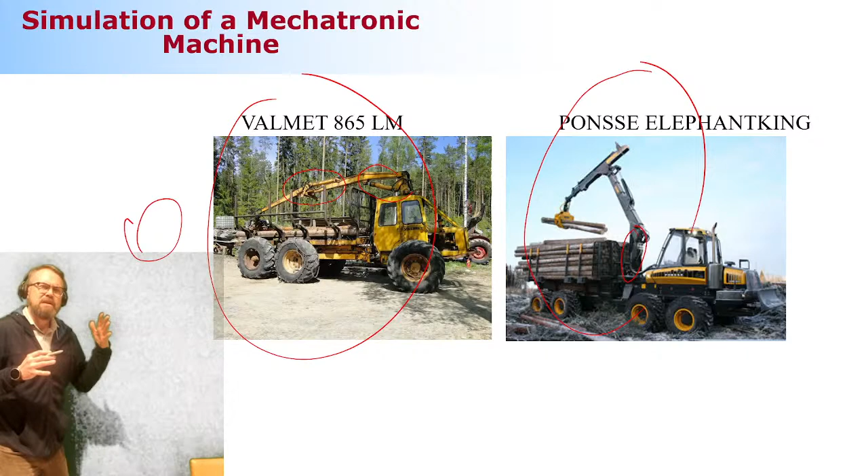There's still this lift cylinder. Yes, it's located in a slightly different way, but there's still a 4-bar mechanism that connects the lift arm and swing arm, connected by a hydraulic cylinder. So roughly speaking, development hasn't been so great.

This is a bit of an extreme statement, but when you step into the cabin of these two tractors, you can see there's a major difference. This is how the cabin looked like 50-something years back. The spools, which are the key element in the direction valve, were operated by manual sticks mechanically connected to the spool. The cabin didn't look so pleasant. And because there's always a great chance of different kinds of leakages in hydraulics, you can see there's a little bit of oil on the floor and so on. The ergonomics are not great at all.

Whereas the new one looked like this. Now in the new one, the direction valves are not directly operated by a stick—there's no mechanical connection. Instead there's a joystick that sends the signal to the direction valve, and that's how you control the machine. The ergonomics are on a different planet. They look much better, and usability is significantly enhanced because of the ergonomics and other features. Still, the operation principle of the hydraulics hasn't changed that much.

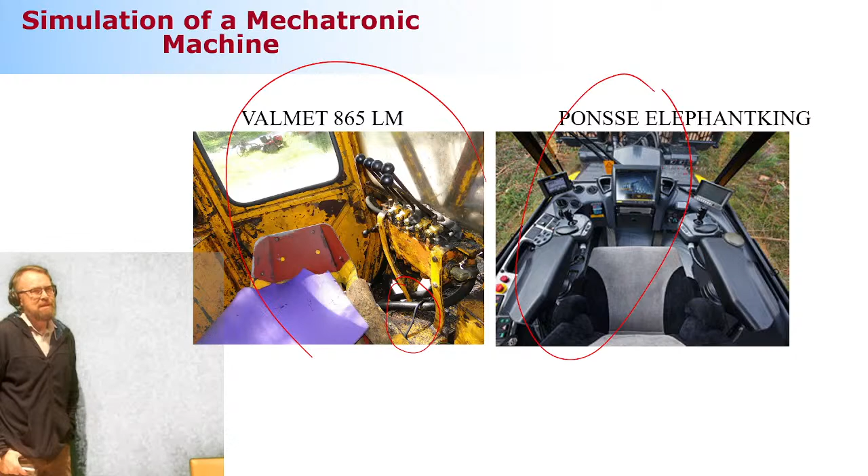But maybe this digital hydraulics will be the next big step. Maybe—it's been a promising field for quite a while already, but we'll see. That's what I'm going to explain to you later today.

What did we discuss a week ago? This first order differential equation that I explained in the first slide is extremely important for us. You must understand each of the components in the equation, referring again to how it's going to be on the written exam.

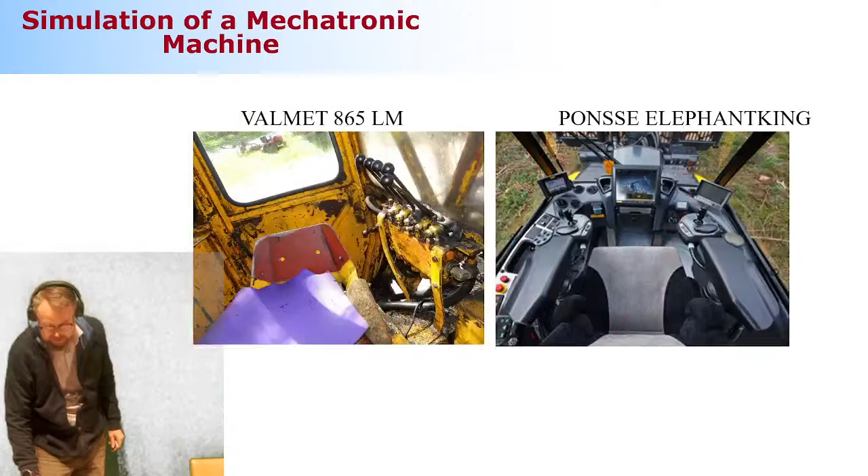Pretty clear, pretty clear. Okay, so undo the enrollment to the full exam and wait until we approach the midterm exam. Are we going to do that right after we've covered everything? Let me take myself back here. We need one more time for hydraulics, and then real-time simulation games, and then summary. So that's going to be two or three additional weeks, and then we're done.

Okay, back to this business - I was saying in terms of the midterm exam, a question you can see is: what are the different components in this differential equation? There is not a question asking you to derive this first order differential equation starting from the Big Bang. We are not expecting you to do anything like that, but we want you to understand the physical interpretation of it, and what it can describe and what it cannot describe.

So it can describe the pressure, and it can take fluid flexibility into account because of the effective bulk modulus. It can take the volume size and changes in the volume size into account, and it can take the flow rate in and flow rate out into account.

But it cannot take into account the pressure waves. Pressure waves sometimes take place in long pipelines - not so much in hose lines, but in pipelines where there's a very lengthy run. You keep on pressurizing it, then suddenly close the pipe - you close it here as well - so it's possible that there's a pressure wave traveling back and forth between these two blocks. That needs very fast hydraulics, and it's not a typical problem in mobile hydraulics. It can be the case in certain industrial applications, but not a very common one.

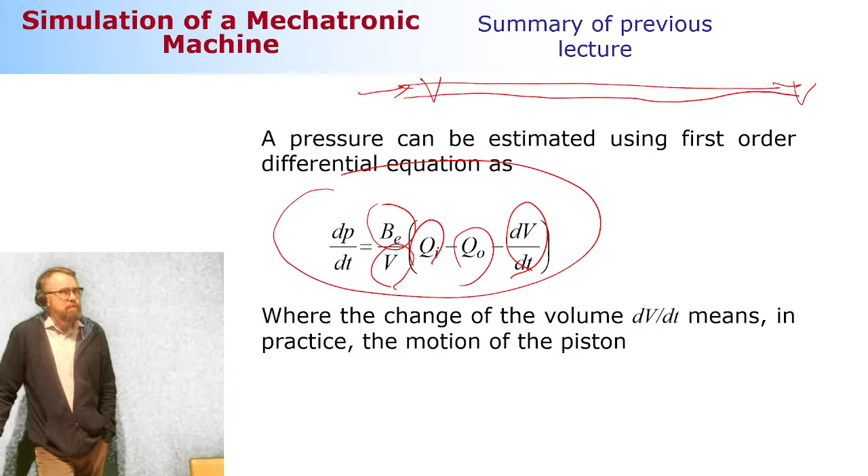You can, of course, take this into account as well by modeling the pipeline using a number of different volumes and throttles between the volumes. But that's not usual practice, because this can easily lead to problems in simulation.

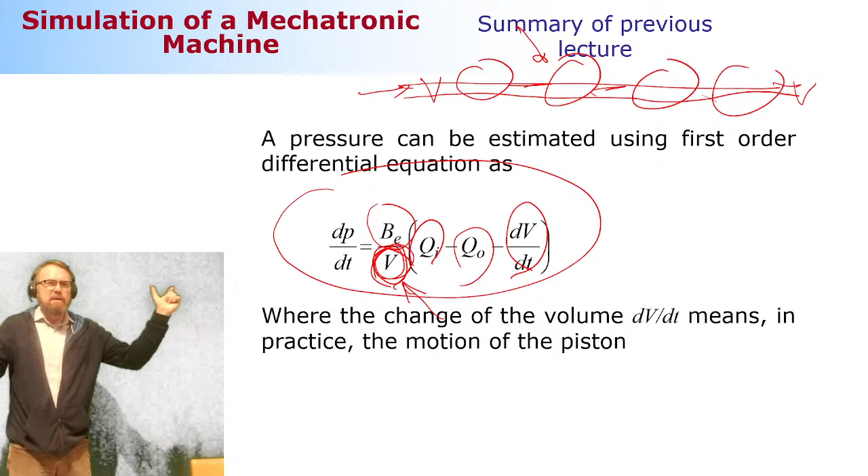The problem would be that if you keep on decreasing the volume size - look at where the volume is located, so the bulk modulus divided by volume - if this volume becomes very small, the numbers will go very high. That's called a numerically stiff system. A numerically stiff system, shortly speaking, is a system where you have a very wide band of frequencies - low frequencies and high frequencies. This combination is very nasty for numerical integrators, because they can tune themselves to deal with high frequencies, or they can tune themselves to deal with low frequencies, but this combination is typically quite a problem, and you want to avoid it as much as you can.

Okay, so that's it, that's about this differential equation. We also learned about how it can be used in the case of a simple damper.

In a damper, here is your first differential equation and your second differential equation, and now the flow rate tries to equalize the pressure difference. This is a bit of a chicken-egg situation: which comes first, pressure difference or flow rate? That doesn't really matter because they happen simultaneously in a simulation. As soon as the pressures here start to change, the flow rate tries to equalize the pressure difference. That's roughly how it happens. But if you suddenly make the flow happen, the pressure difference will take place as well. So that's the chicken-egg situation.

We learned that in real hydraulic circuits there's something called the discretization procedure. In discretization, you divide your hydraulic circuit into volumes where you assume pressure is equally distributed, meaning we cannot take pressure waves into account. That means I can assume the pressure right after the throttle is roughly the same as the pressure close to the piston, and that's the case if there's nothing introducing pressure losses. There's nothing introducing pressure losses the way this system is described, so this assumption is valid.

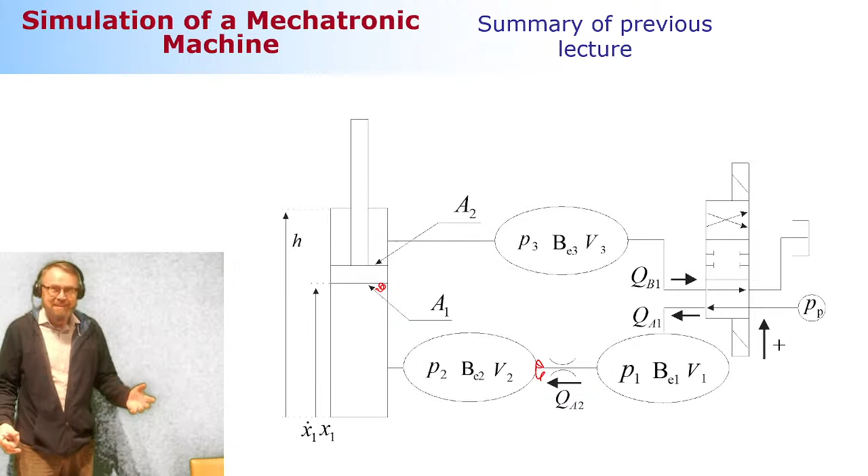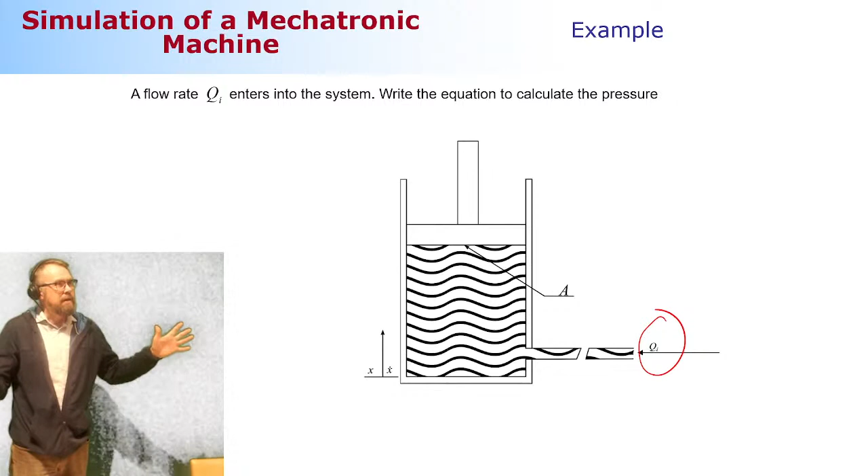So now I have a system here which is a hydraulic cylinder, and flow rates enter the cylinder. So what's going to happen to it? The flow rate, noted here as Q, came into this system. How can I compute the pressure at any given time using this first order differential equation? Again, certain steps we need to take.

First step is we need to define the equation that tells us what the volume size is. The volume size will be the hose volume, VH, where the flow enters the cylinder, plus the cross-section of the piston, A, multiplied by the stroke—wherever the piston location is at any given time, measured by X. X coordinate starts here; the farther off the piston is, the more the volume size. That's your first equation.

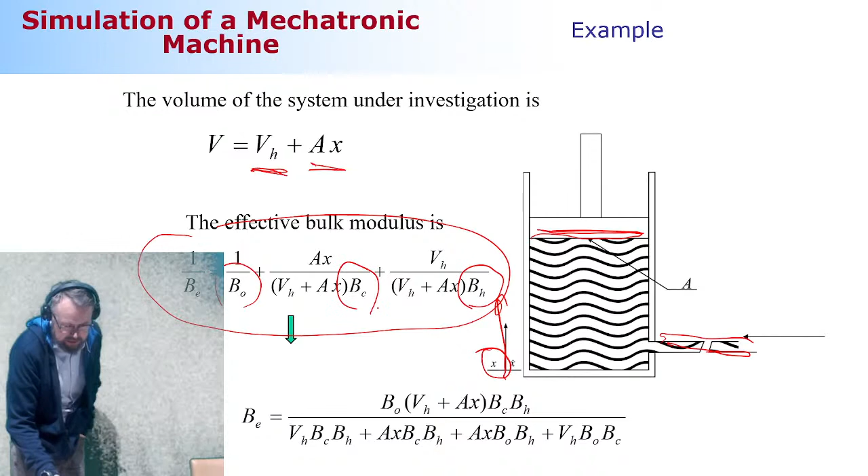Second one is the effective bulk modulus. The components I have are oil, accounted for by this term here, then the flexibility of the hose, and the flexibility of the cylinder, each with their corresponding volume size. When I compute the effective bulk modulus out of that equation, that's how it reads.

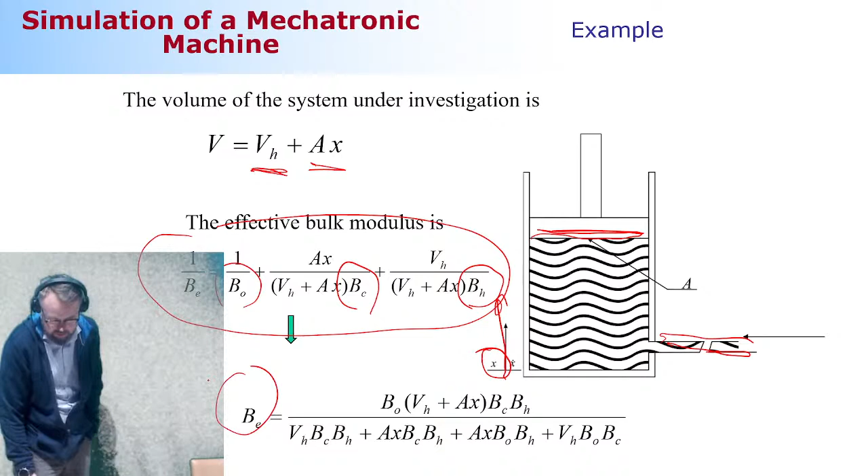The final equation is the volume change as a function of time. That's going to be the cross section, same as described earlier, multiplied by x dot, which is velocity. That's going to be your flow rate—cross section multiplied by corresponding velocity. That's the flow rate which is leaving the system, so when you enter it into your differential equation, this term must be negative in sign.

Think about positive motion: the volume gets bigger, so it's sucking the flow rate out of the system, so the pressure will drop.

Then the final component, this Q, is entering the system, so it has to be plus in sign. Whenever you do this kind of manual hydraulic modeling, make sure you have a drawing so you don't get confused about the signs, minus and plus, because that's a typical mistake I see in hydraulic modeling. Make a drawing to yourself, see whether the volume comes in or leaves—if it comes in, that's plus; if it leaves, that's minus. Simple like that. How you initially define things is up to you, but you need to be consistent, and the only way to be consistent is to make a drawing to yourself.

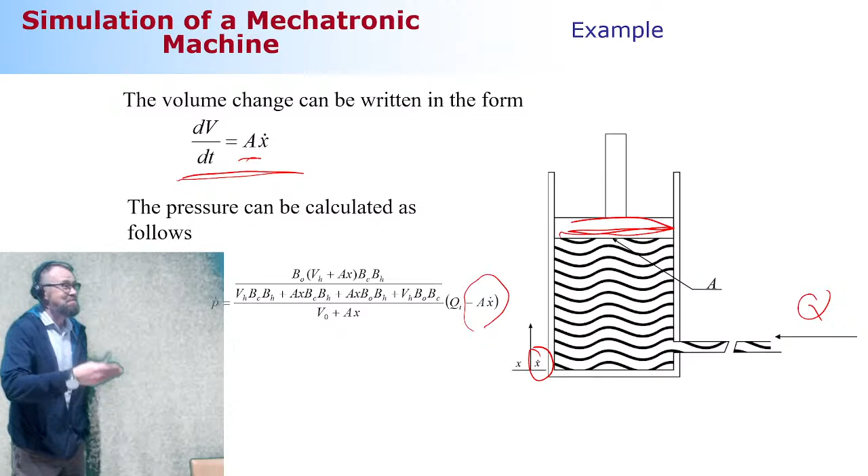All right, so have you guys seen this YouTube video about the worst professor ever? I was making the presentation for this week, Wednesday, and I was watching that one more time because it's so good. The worst professor ever keeps telling about 'make a drawing, make a drawing.' And I see that I am kind of like that guy too, because I keep on telling, make a drawing, make a drawing. So make a drawing, and take a look at this worst professor ever from YouTube.

So none of you have ever seen it, or have you seen? No, you haven't. Okay, go to YouTube and type worst professor ever, and it's not me, but it's somebody else. It may be me too, because there's a long list of professors that are not scoring so well, that they are not teaching so well. So you may check that if you want.

All right, this is something related to the flexibility or compressibility of a fluid. This is related to the assignment. Maybe this is coming a little bit late, but I wanted to explain how you can compute the natural frequency of the situation as described in this figure.

What I have in the figure is a hydraulic cylinder, which is a two-way hydraulic cylinder, so you can pressurize the piston side and piston rod side. So it can be pressurized on both sides of the piston. Then I have a mass located at the top of the system, denoted as M. And I'm asking, what is the natural frequency of the system?

The natural frequency can be computed when you know the stiffness and the mass. It's all the time a relation between the stiffness and the mass, more specifically the square root of the ratio of stiffness to mass. So the mass goes directly here, and the only component you need to define is stiffness.

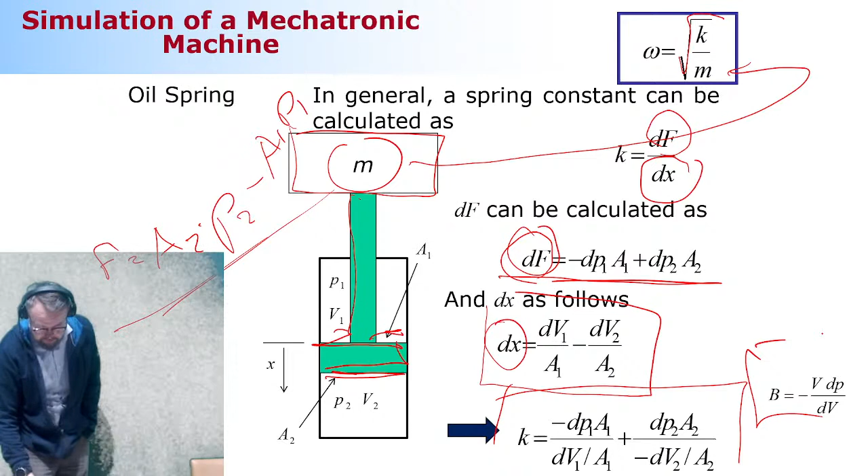Now if you use the definition of bulk modulus, sorry that I'm a little bit fast here. Using the definition of bulk modulus, you can use this relation, which came from the definition of bulk modulus, sorry about that. So it came from this equation, and this came from the previous slide. The stiffness can be computed as shown here.

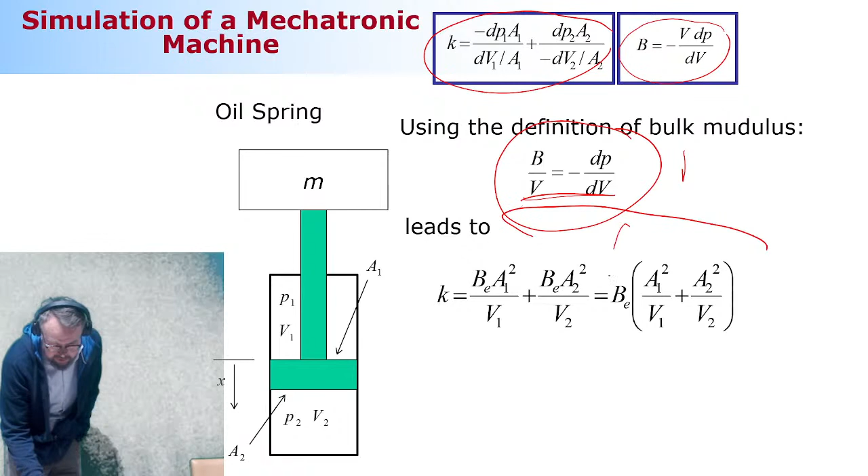And this will be your way to compute the natural frequency of the system that consists of the mass and the two-way hydraulic cylinder. How does that sound?

Makes sense. How do you do it then? By substituting the right component in the right place. That's pretty much all you need to do. The most problematic component is, of course, this guy, the effective bulk modulus. But other than that, fairly straightforward.

Makes sense. Okay, so moving on then. Let's look at the one thing I was unable to cover a week ago, and that is these flow types. Then we're going to move on to different components.

Now the flow types, as I mentioned in my introduction today, we have two different flow types: laminar flow and turbulent flow. Laminar flow is something where the viscosity plays a role. And that takes place, well, roughly speaking, very generally speaking, laminar flow takes place when the pressure difference is small. This is an untechnical term - when the pressure difference is small. How small does it need to be? Well, roughly speaking, if it is less than 2 bars, then there's a chance that the flow type is laminar flow.

Now, in a modeling perspective, there's a major difference between laminar flow and turbulent flow, and it's all related to how the pressure difference relates to the flow rate. So, the scenario is this: here's my pipe.

And I have here some kind of a throttle, something that introduces the pressure losses. I have here P1 and P2, and I'm assuming P1 is bigger than P2, so the flow will travel from left to right. The pressure difference I keep mentioning is, of course, P1 minus P2. Since P1 is assumed bigger, this is going to be a positive value.

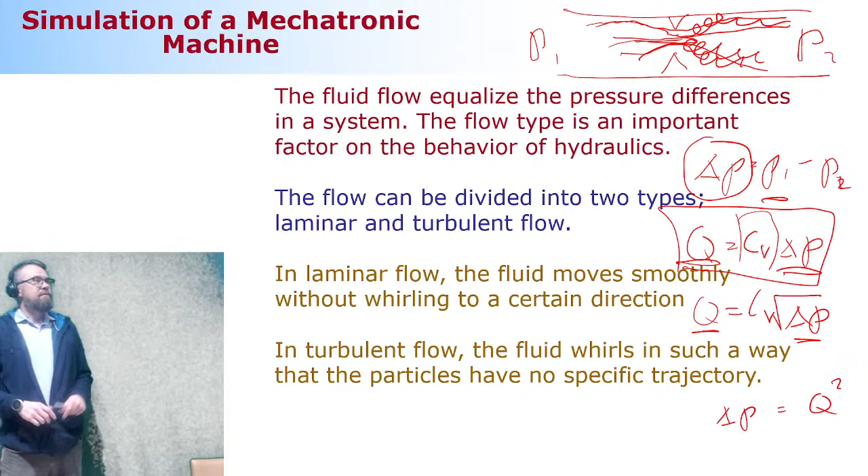So these are the two flow types, and for us, the turbulent flow is way more significant. That's what we're going to take a closer look at when examining the different components. Okay, so that's about it. And then how are you defining what is what?

Theoretically, there's a way to do it, called the Reynolds number—I'm sure you're familiar with this. The Reynolds number tells you when the flow will convert from laminar to turbulent. Of course, it's not a single moment when that happens, but a period of pressure differences where it's unclear what it is—it can be a mixture of laminar and turbulent. Roughly speaking, though, you can define what is what by comparing the Reynolds number against something called the critical Reynolds number.

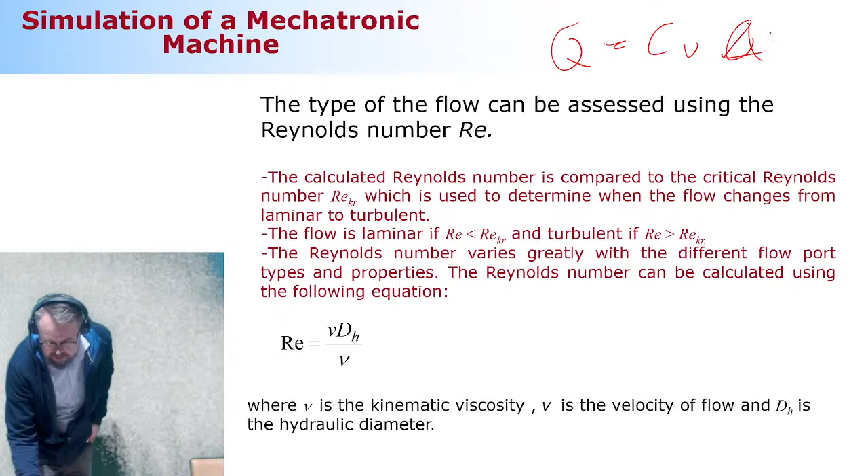The critical Reynolds number is something you can find from pre-calculated tables. If your number is less than the critical Reynolds number, you can safely assume your flow type is laminar, meaning that in modeling you can use this relation with delta P. That's how it goes. Again, if you look at flow rate versus pressure difference, this behaves linearly, and the angle here is defined by this one single parameter.

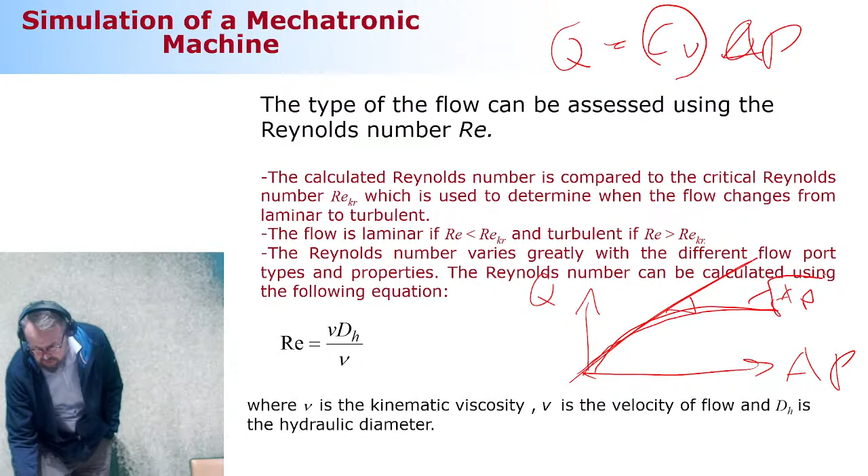Now, if the number is more than a critical Reynolds number, then it's assumed that they behave quadratically. So this curve here is a square root curve like this. Roughly that's how it behaves. So that's for your information.

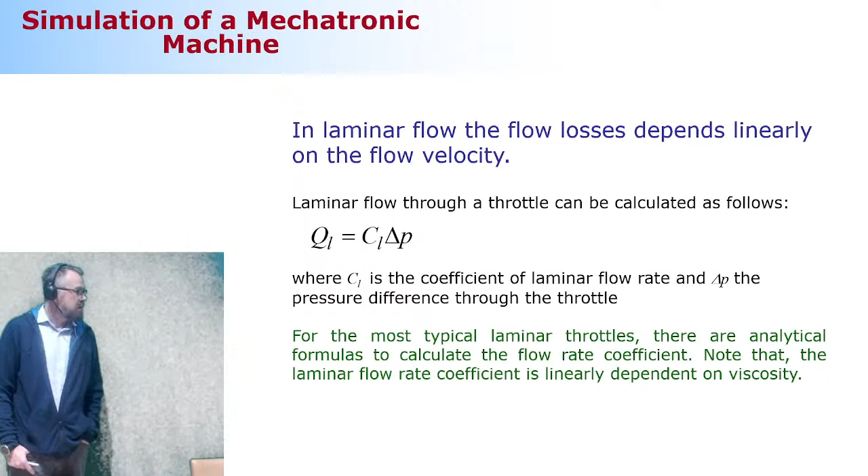Now, this is what I pretty much explained already. This is how the flow rate and pressure difference are related in the case of laminar flow. Keep in mind that there is this one single parameter, the angle of the curve, that relates these two matters. How do you compute it?

Well, here is an example about the pre-calculated tables. You see that if you have a rectangular cross-section throttle. I don't know how you can manufacture something like that, unclear to me. But anyway, there's a flow entering here and leaving here. In a case like this, take a look at this.

So flow rate and pressure difference are linearly related. This angle is defined once you know the B and H. This is H and this is B. Once you know the geometry of the throttle, and the L is the length here. And look at this, this is kinematic viscosity. Viscosity is involved as well, as I explained a week ago, I think.

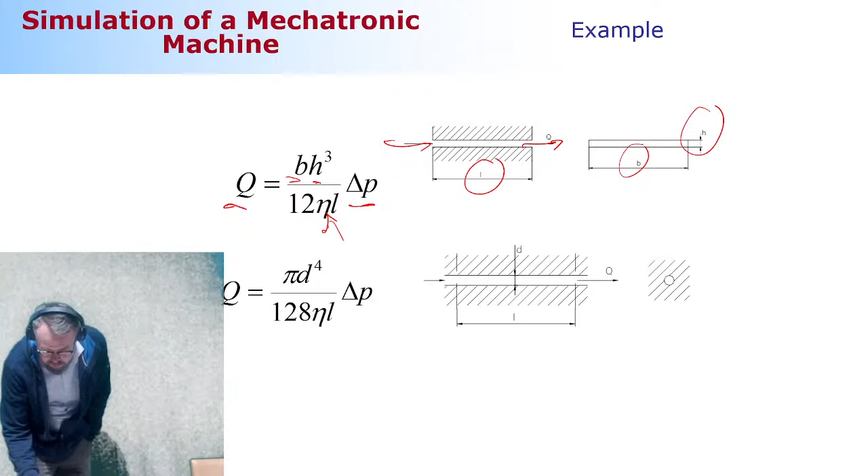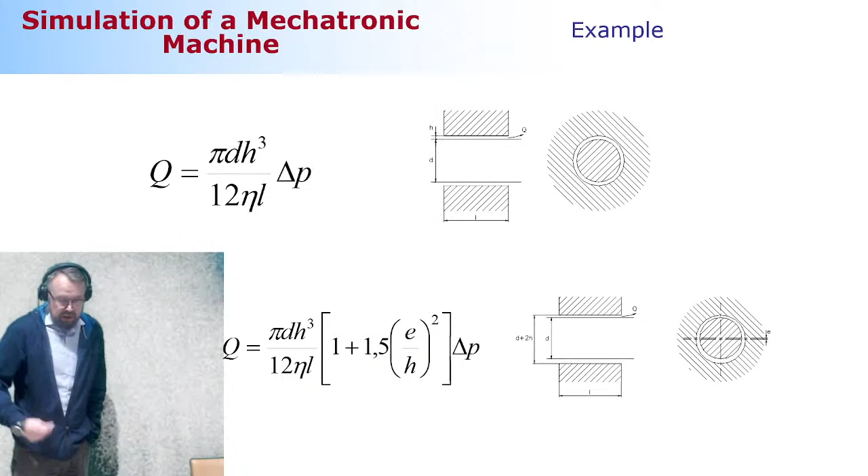So that's the case. Here is a little different kind of throttle, which is very commonly used. This is drilling. So once you know the diameter of the drilling and the length of the drilling, that's all you need to know. The viscosity is needed as well. And then more and more examples. There are pre-calculated tables to compute that missing parameter.

Makes sense? Okay, then finally, this turbulent flow, where from our perspective, the important information is this: flow rate and the pressure difference are quadratically related. So meaning that if you see the curve like this, which is nonlinear and acting quadratically, that's going to be the turbulent type of flow. This type of flow, if you see it, you can't model as a laminar flow.

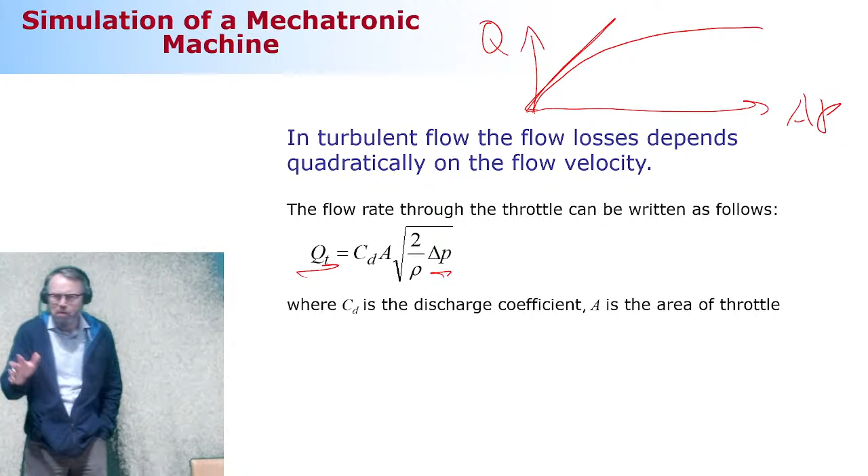So next time you see Professor Handroos, make sure you salute him because of his accomplishment regarding the semi-empirical modeling approach. Deal? Don't do it, because then he's going to ask, what is wrong with you? Who asked you to do it? He's not going to be happy with me.

Okay, so here are the different components. The first one is a throttle valve. This takes us back to your question of how you can model it. Throttle is already a component where you need to know the dimensions, and it becomes more complicated when you look at other components like the direction valve. The direction valve has a throttle size that is changing continuously, because there's a spool plugging the flow, sometimes a little, sometimes not at all. So how do you take that into account?

And within 10 minutes or so, there's going to be the first-in-class quiz of the day. Ready for that?

Okay, so the first one is a throttle valve. This throttle valve is a good example of the semi-empirical modeling approach. Before we step into that, what are the modeling possibilities we have?

Well, of course, we can use analytical approaches to model this component. That would mean we need to use all the parameters found in real life. For example, with a pressure relief valve, you need to first create the equation that defines where the spool or poppet is located, and based on that, compute the orifice or throttle size, its physical dimension. But you need to know the mass of the poppet, the spring coefficient, and many other parameters that are extremely difficult to get. So that analytical approach is not practical.

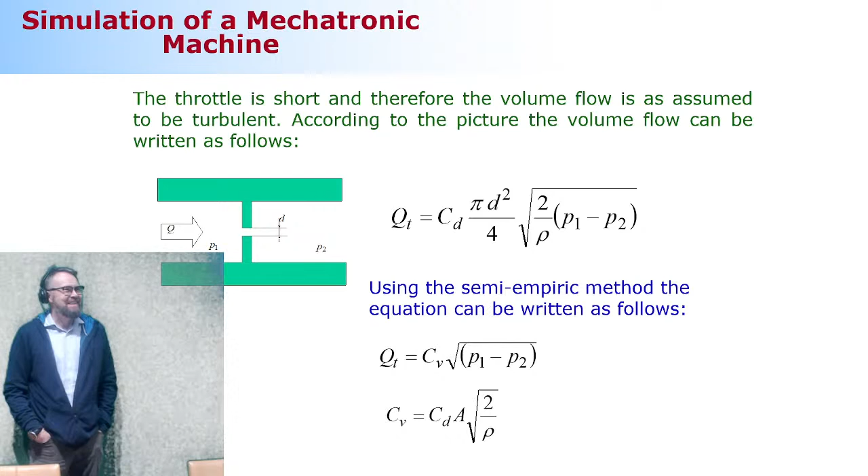Okay, so we were here, we were in this throttle valve, and here's an example. This is a characteristic curve. How come I lost it? Okay, so it's back. All right, so this is a characteristic curve offered by a manufacturer.

What I have in this characteristic curve is flow rate, and look at the units I'm using. I'm using liters per minute, which is the typical way units are used in hydraulics. But when I want to create the model, I want to use SI units as much as possible, because converting units in hydraulic modeling is a big headache and not recommended. Try to avoid it as much as you can. So that's going to be my flow rate.

The pressure difference is this one here, offered in bars. Bars, another big headache, but this is how you typically see the units used. Again, it's extremely important that you convert everything to be in SI units. Okay, my pressure difference is here, my flow rate is here, this is my characteristic curve.

The first thing I can learn from the characteristic curve is that this particular component has turbulent flow. How do I know that? Because of the quadratic nature of the curve, it's not linear, but quadratic. So if that's the case, it doesn't matter where I take the point from the curve, I can take it anywhere I want. I substitute the information into this equation, which defines this semi-empirical parameter CV.

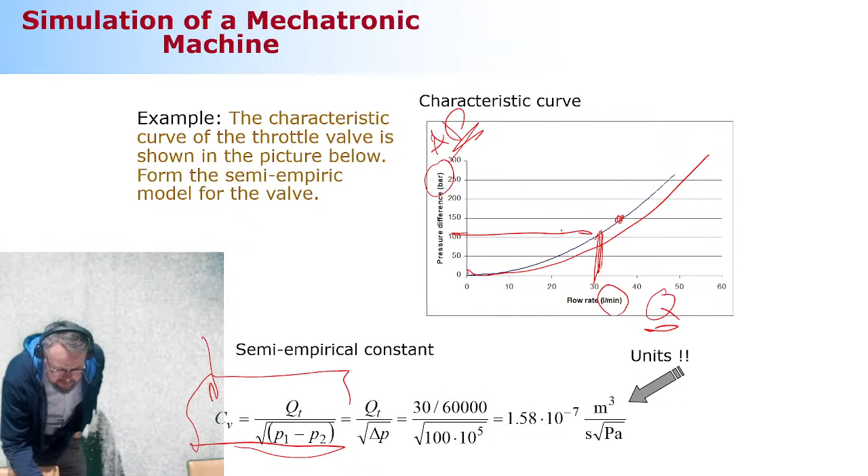So I'm taking the point at 30 liters per minute, and in that case the pressure difference is 100 bars. This is when I converted 100 bars to be in SI units, in megapascals, so it's in pascals, and then this 30 liters per minute is converted to SI units as well. When I do the math, this is how it looks.

Take a look at how bad the units are. So you don't want to convert the units because they are so bad. Anyways, so my model is almost ready, I have my unknown parameter.

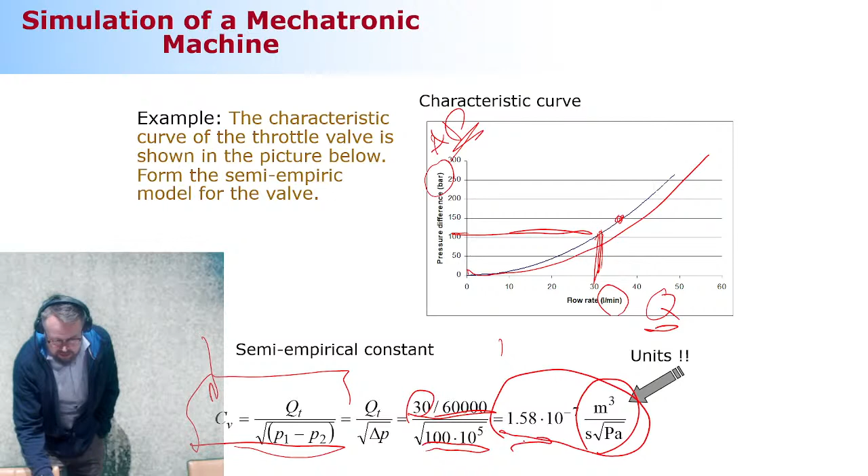Only thing is I need to make this final equation, shown here. My flow rate through this component will be my semi-empirical parameter multiplied by the pressure difference. But because the pressure difference might have a minus sign, I need to use a minor trick here. This term under the square root, I'm going to use an absolute value there, so I make sure that whatever goes under the square root must be positive in sign.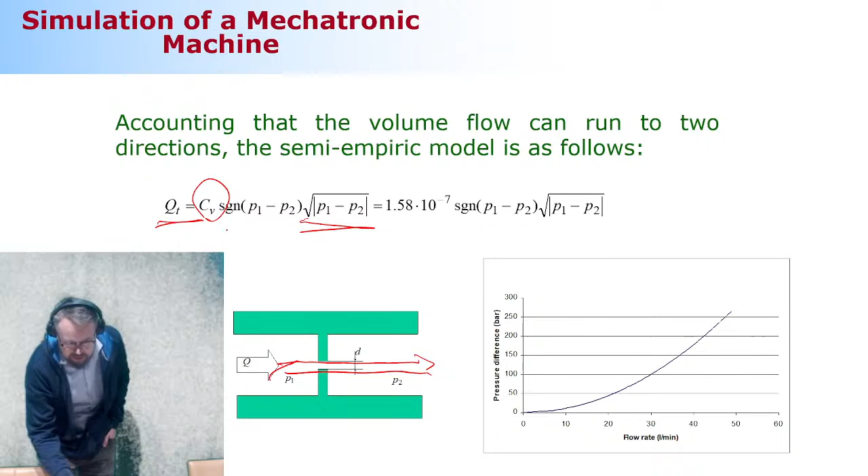But because the flow can go left to right and right to left, I need to take that into account. I'll do that by using a sign component, shown here. The sign component gives you 1 or -1 depending on what's inside the parenthesis. If the value in the parenthesis is negative, sign gives you -1. If it's positive, it's 1. If it's equal to 0, it's also 1.

That's going to be your equation. End of the story. How does that sound? That's called the semi-empirical modeling approach. Pretty straightforward, right? Okay, let's take a look at another component.

Direction valve. There are many different types of valves, and we're going to look at a valve actuated by using a magnet, though it doesn't necessarily need to be the case. Remember, we looked at valves in the very beginning where these were mechanically operated. There was a stick connected to a spool, and the spool is the one that moves inside of the direction valve.

Now comes something extremely important related to valve modeling, because valves consist of a moving component. So the first step in modeling valves is to know where this moving component is located. You could model that using the equation of motion, but that becomes complicated because then you need to know all these tiny parameters about masses, springs, and so on.

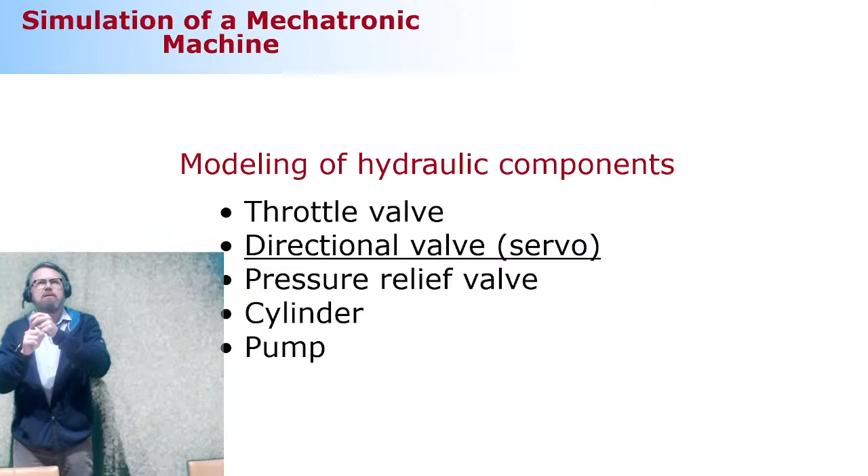It's not recommended to do it this way. But you have to have some kind of equation that tells you where the spool is located with respect to the valve itself. That's going to be the first step. Once you know the valve position, then you can compute the flow rate through the valve. So two steps are needed, and here it is, put in writing.

So here's an example. What you can see on the right side of the slide is a pressure relief valve. The pressure relief valve is typically closed, and it's closed because of the pretension of the spring here, which makes sure that the valve fully closes this cap.

What then happens is that this spool is pressurized here, but the same amount of force is created in the opposite direction because of how it's constructed. So it will remain closed no matter what the pressure inside is.

But then we have this kind of secret tunnel, right here. There's a throttle valve that reduces the pressure, taking pressure to this side of the spool. Because of this pressure, when it becomes higher than the pretension of the spring, it opens.

But how much it opens at any given time—one possibility to model it would be to take the spring coefficient, pretension, mass of the spool, and friction into account, but that becomes too complicated. We don't want to go that way. So we want to use a shortcut to model the spool position.

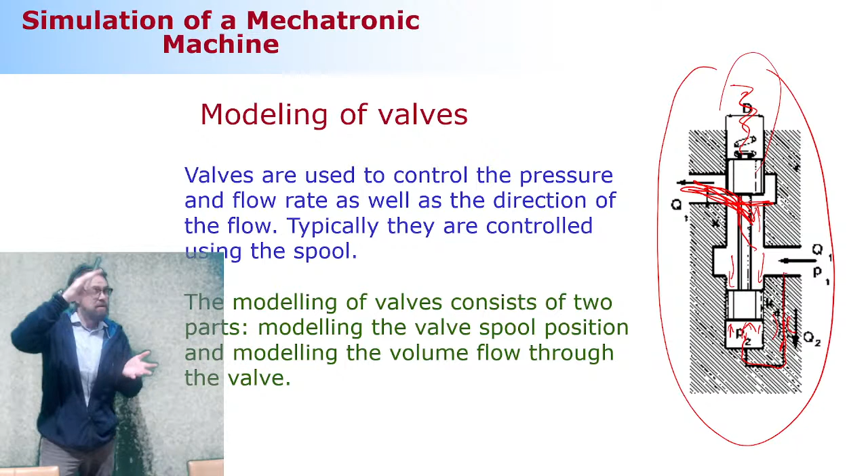Okay, makes sense. So how can we do that in the case of a direction valve? Well, before we look at that, let me give you a little bit of vocabulary about what you need to know. The direction valve operates because of this moving spool.

There is a spool that goes left and right, as you can see in this picture here, and there is a land. The land, which is this thicker part of the spool, blocks the direction of the flow, or blocks the access of the flow. The drawing symbol of this valve looks like this.

It connects ports A and B by pressure and the tank. If there's a pressure line here and you move this stick to the left, it opens the line between A and P. When you move the stick to the right, it connects the pressure and B, which is this operating condition.

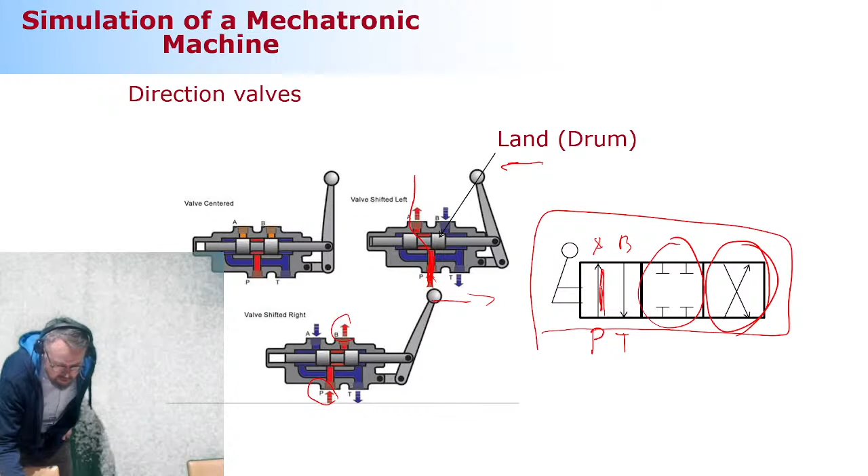When the spool is in the middle, it's assuming no flow rate whatsoever. There are three different scenarios: P to A, P to B, or no flow whatsoever. So to determine which scenario you need, you must know the spool position. But not just that, you need details of the spool position, because the throttle size will vary, as in the case of a pressure relief valve. It's not necessarily fully open or fully closed, but can be anywhere, because this sticks. You can put it anywhere you want, 1/4, 1/5, anything is possible.

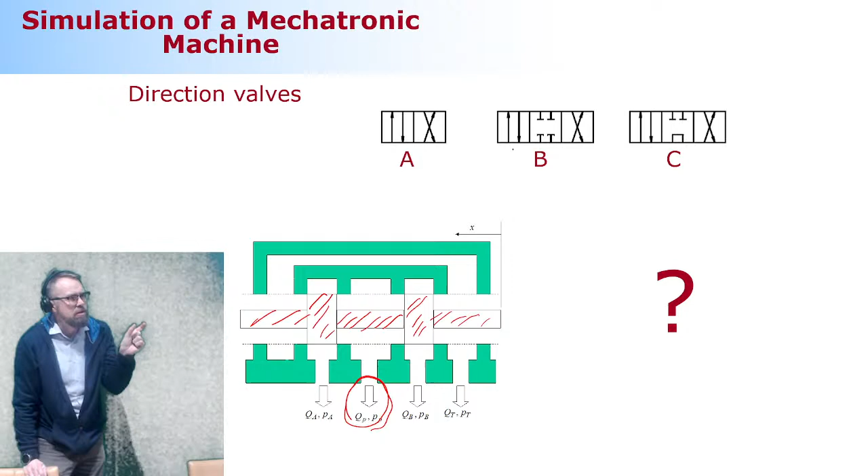Here's another cross section of the direction valve. In this case, I have the pressure line here in the middle, and again there's a spool. This component is a spool, this is a land. This is called a zero lap, because it just barely blocks the connection when it is in the middle. Sometimes the land could be smaller than this blocking, so it's possible that even in the middle condition there's a flow rate that travels between the different possibilities. But here it's just blocking it.

Understand that if I'm moving this to the left, it's going to open this channel here, so P and A will be connected. And if you move it to the right, then this will be opened instead. That's the way it works.

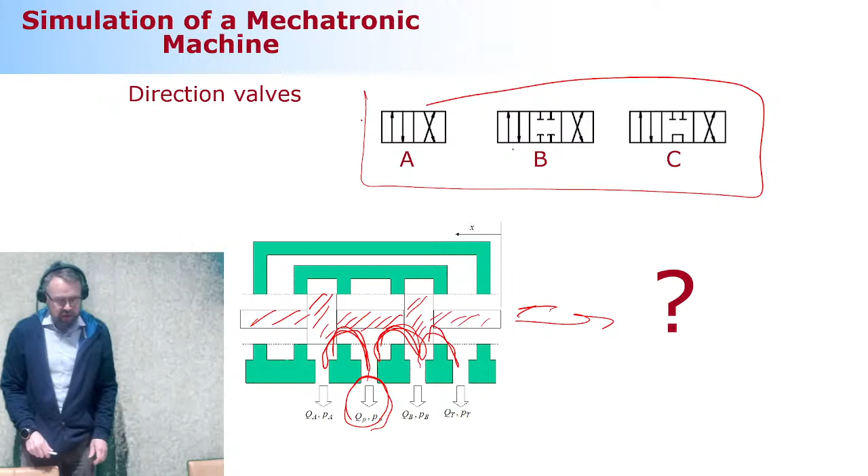So what is the drawing symbol for the direction valve as shown in the picture? This is not an in-class quiz, but soon there will be one. Is it A, B, or C? You can relax, this won't make your life any different since it's not the in-class quiz, but which one is correct?

Okay, so Team A is voting. Is the entire team voting for this one, B? Okay, what about Team Finland? No comments. Okay, no comments from Team Finland. What about the other teams we have here? No other teams, also no comments. So we only have one team voting B. Okay, other teams, do you agree with Team A, or do you disagree? It is B.

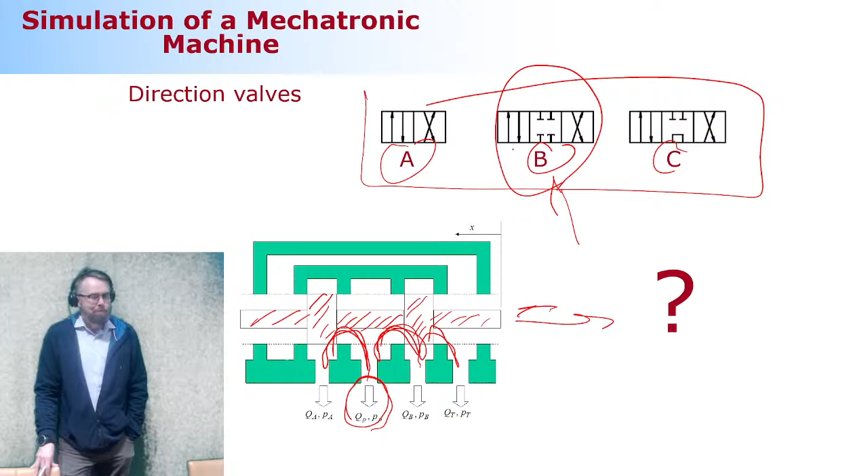It is B, because this connection is missing, since it's a zero land system. That's how it is. These are the different scenarios. This is where the land is smaller than these drillings, so its middle position is this - this is what we just looked at. This is where the land is a little bigger than the drillings, and it's still going to be the same drawing symbol.

But then comes something extremely important. The valves can be constructed differently depending on how the flow rate to the valve relates to valve opening. Many scenarios exist, and in this class we can assume this relation is linear. We also assume we're dealing with zero land valves, meaning as soon as we move the spool left and right, there is immediate flow. But that's not necessarily the case, because with a positive land spool like this, you need to move the system quite a bit left and right before you see any flow.

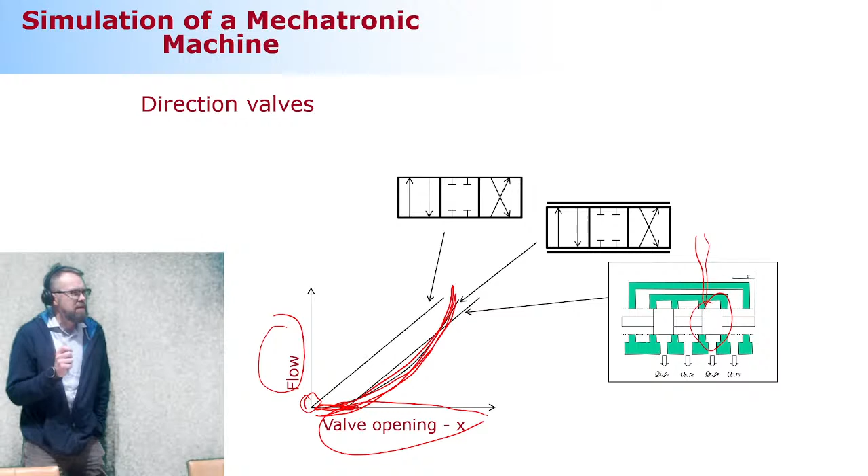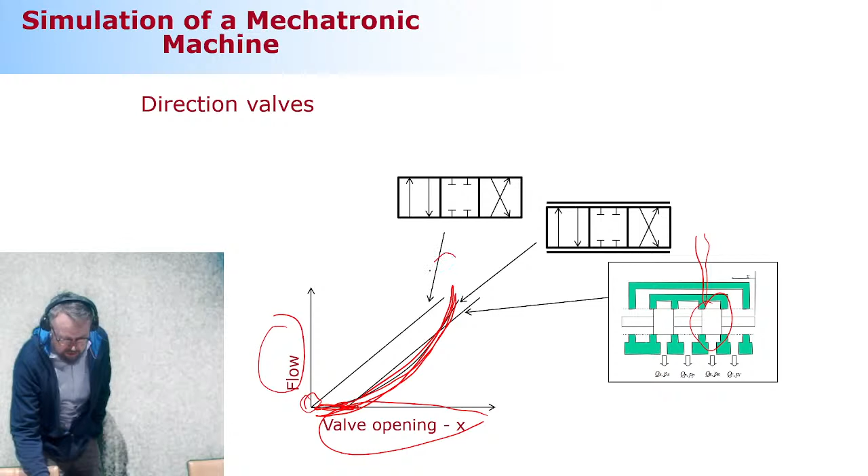You need to get rid of this overlapping, and you can get rid of it by moving this much to the left and right. But then there's one very much used type of valve, the proportional valve. That means the valve opening and flow rate are not linear, but nonlinear, like the scenario shown here. This is used quite a bit in certain applications where you need a lot of velocity, like in a crane - sometimes you need full speed, sometimes you need a lot of accuracy. When you use full opening, you have full speed, a lot of speed, whereas when you come close to this position, you get a lot of precision and accuracy to make sure you're exactly positioning your system where you wanted. So that's the proportional valve.

Okay, now that is the modeling business then. Like I said, there are 2 steps to take. The first step is this. And now, please put your full attention to me, because I'm going to ask momentarily what this equation is describing.

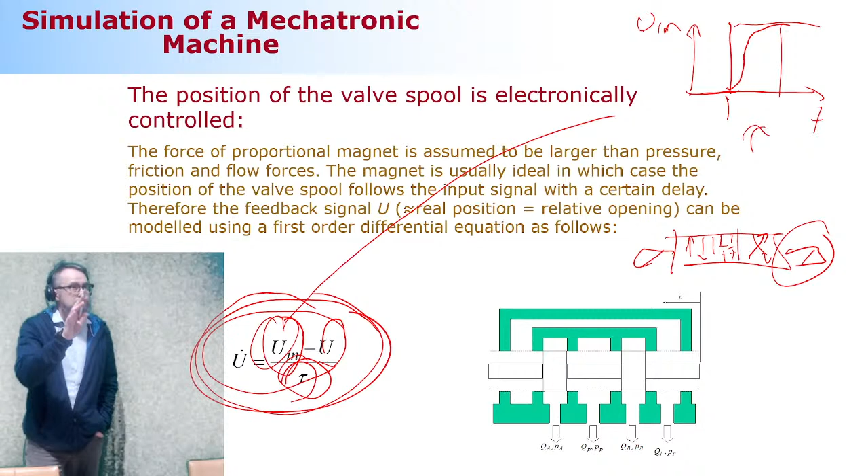But my question is, what is this equation describing? Do you guys know what it is? Spool position. And once you know the spool position, then you can compute the flow rate through the valve.

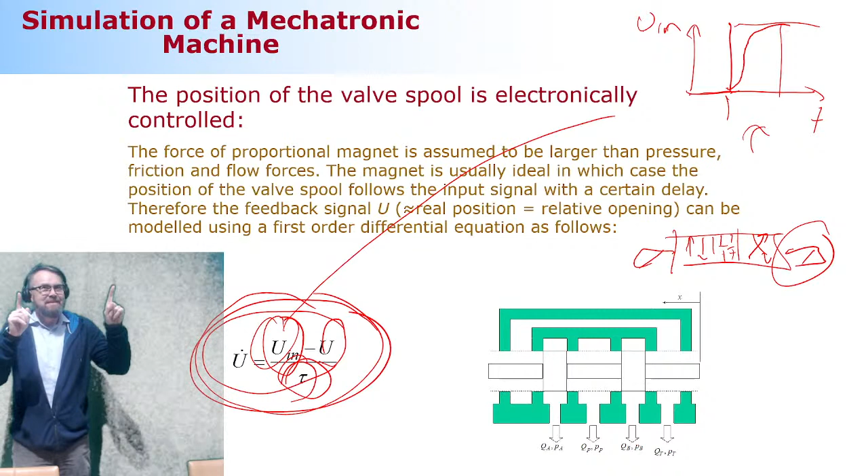All right, so where can you get this time delay then? Now you can get it from the manufacturer's catalog, because manufacturers offer information about how fast the valve is. And it's made by an experiment where you're sending a signal to the spool, and the signal is a sine signal where you start increasing the frequency.

So it's a fully closed, fully open signal to the valve, and you're increasing the frequency until it is very high frequency. At a certain point, the spool cannot follow this anymore, so it's left behind because it cannot move as fast as the signal itself. And when it's left behind enough, that's when it is defined that, okay, that's going to be your speed of the valve. It comes from what is called a Bode diagram.

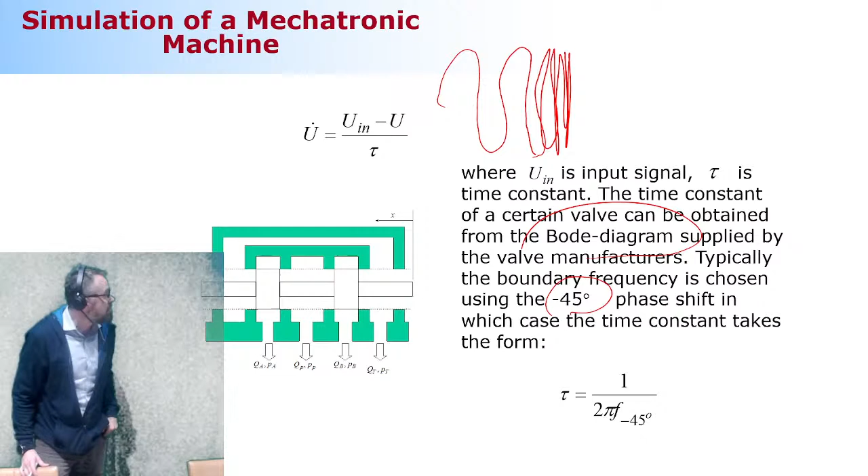I'm going to show you an example momentarily. And when it is left behind something, the value of minus 45 degrees, that's your speed of the valve. But again, this is offered by the manufacturer's catalog. Example will come momentarily. Okay, makes sense?

All right, then once you know the spool position, the final thing to do is model the flow rate, and we're going to use this semi-empirical model where the spool position is multiplied by CV. CV you can get directly from the manufacturer's catalog. End of the story - it's simple like this. First, spool position using this delay equation with tau coming from the Bode diagram, and once you know the spool position, you can compute the flow rate through the valve.

And again, you need to know the pressure difference that is coming from other sources. But that's it - pretty straightforward. Makes sense? Makes sense. Okay.

Okay, how is the success rate then?

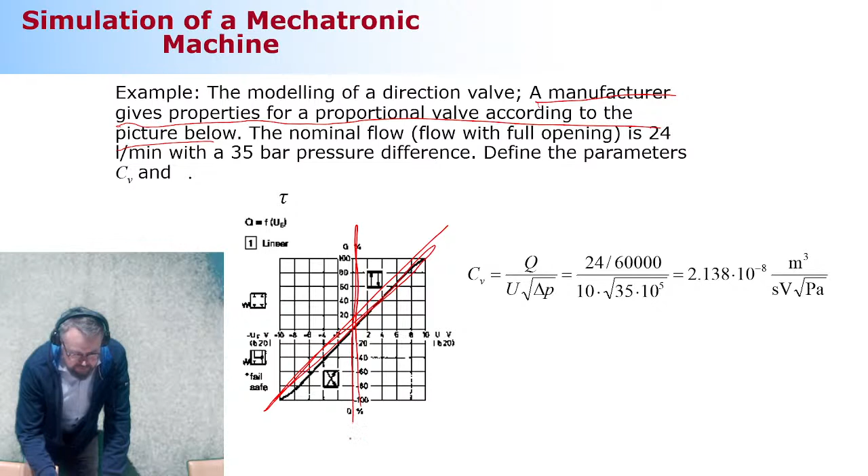Example: model of a direction valve. A manufacturer gives the properties of the proportional valve according to the picture below. Here's the first picture. It shows the valve opening versus the flow rate. You see this is a zero-lap valve, because as soon as you move the spool left or right, flow starts to go through the valve. So it's zero land. And you can also see that the relation between valve opening and flow rate is roughly linear—not exactly, but linear enough to be modeled as linear. The manufacturer's catalog states that the nominal flow at full opening, meaning this point here, is 24...

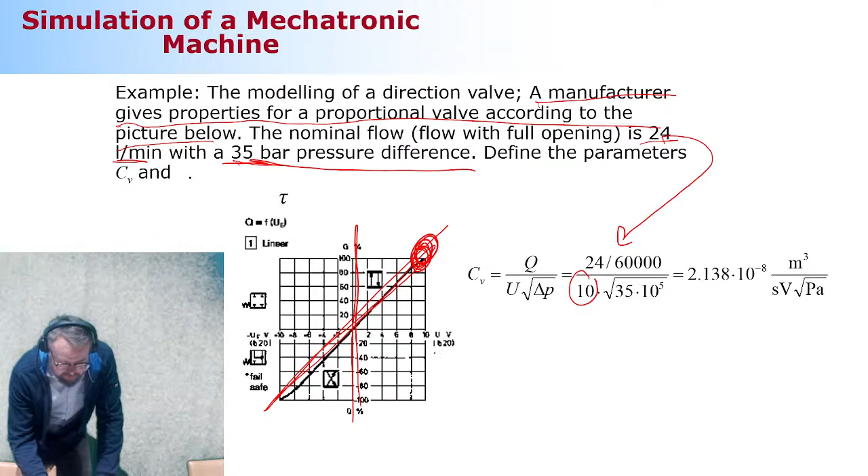24 liters per minute when the pressure difference is 35 bars. Here's the information I need to compute my semi-empirical parameter. I'll take these 24 liters and convert to SI units. I'll take my fully opening—here it's 10 volts—and put that there. Then I'll take this pressure difference and convert that to SI units as well. And here's my semi-empirical parameter.

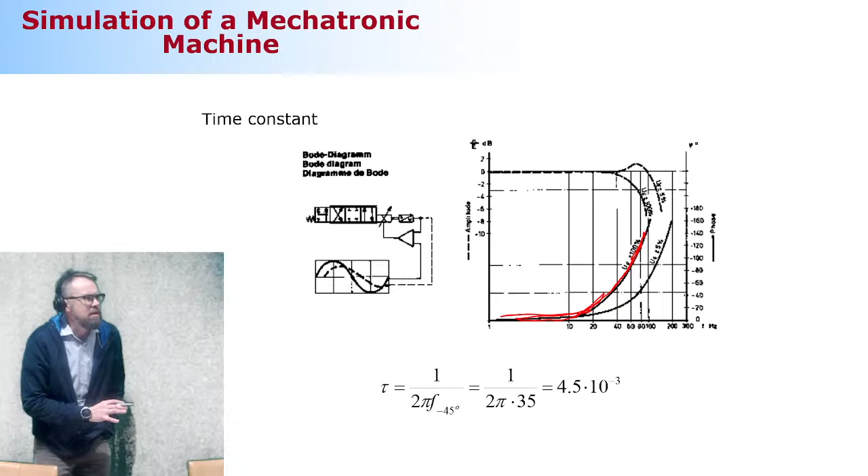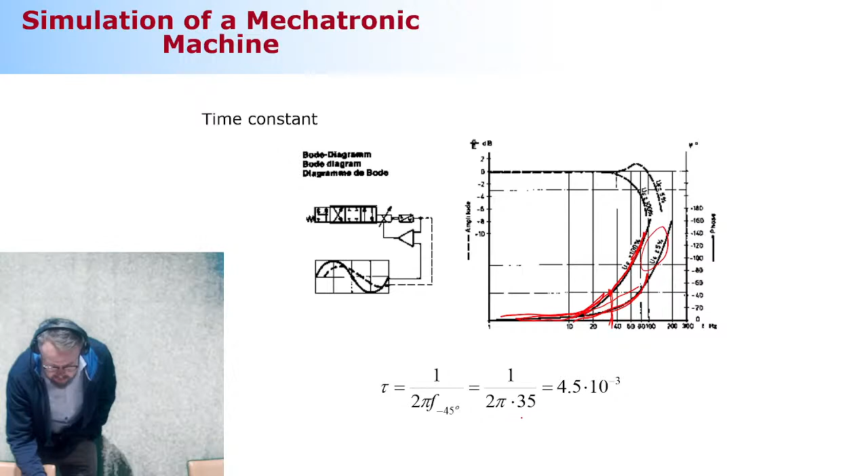Then I need to know about this time constant, tau. Here's a Bode diagram. It shows how well the spool can follow the signal—this is a sine signal. When moving this valve from fully open to fully closed, this is the curve, like 100% opening to 100% closing. You can see it follows very well until the frequency reaches roughly 35 hertz—that's when it's unable to follow anymore. That's my time constant. But if using only 5% opening instead of fully open, it's able to follow the signal further than in the fully-open case. But let's take the worst possible scenario—so here's where the hertz value is taken, and this is my time constant. The final equation isn't combined, but the parameters are here.

Okay, so let me take myself back here and look at the in-class quiz. Okay, so the success rate is going to be 65 today—that's my guess.

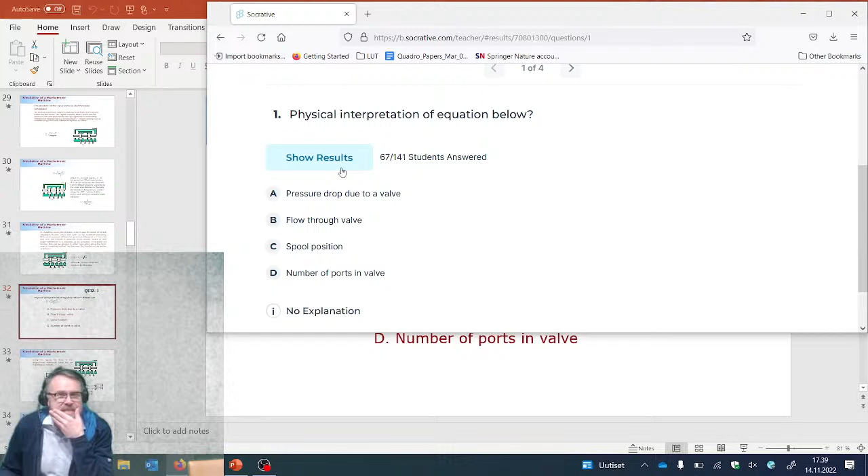Okay. So you don't see it? Oh, okay, you want to see it? I can tell you. You don't trust me. Not yet. Okay, so are you guys ready? So that came with a yes. Okay, because I think—my guess is 65%. 65, 65, 65, 96, 96. Look at the winner, so where's the winner? Here's the winner. Here's the winner. Very nice, thank you very much. Thank you very much. So let me see.

Okay, so very bad news, because we got voting for each of the items—each of them—and only one is correct. And of course, that's spool position.

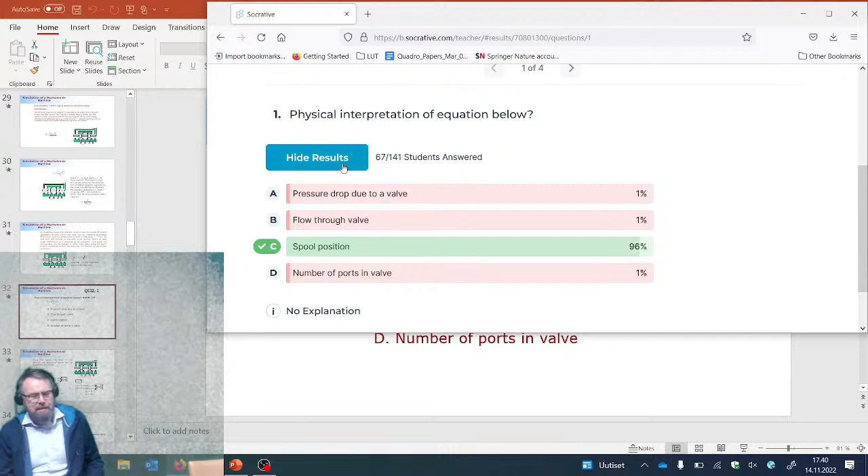Yeah, sorry about that. I don't know how you made it a week ago—I still don't get it, how it is possible. Today you don't score 100%, but last week there was no proper guidance and you scored 100%. So there must be a technical trick you made for me. Must be. So tell me what it is. I'm not going to be angry with you guys. Really? So how much does that make a difference? Okay, I see. All right.

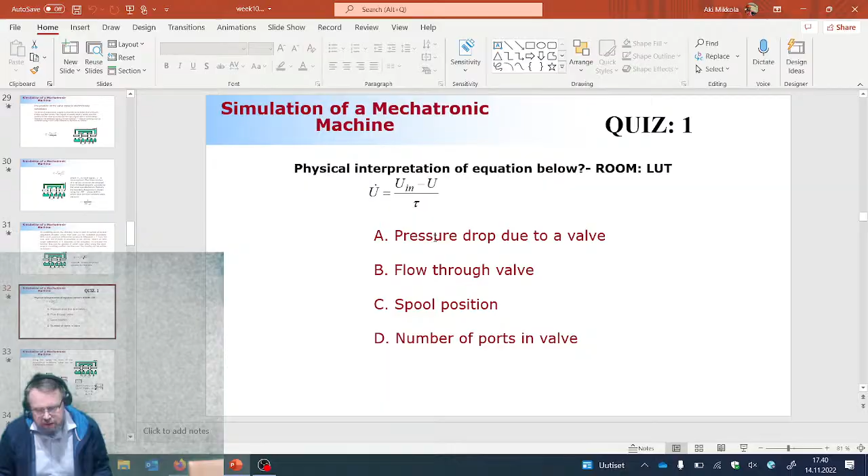So then—not this, sorry about that. I need to do it first, this one, and then this one. No, you still don't see it. Ah.

Okay, now you see it.

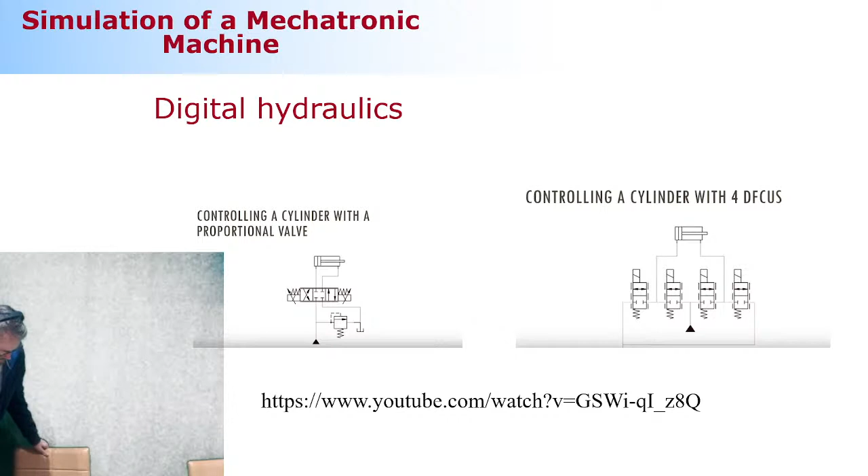Let me tell you something about digital hydraulics. I wanted to play a YouTube video for you, but my settings are not allowing me to do so. So let me explain it myself, and later you will take a look at the YouTube video, which is about 3 minutes long. That will really make sense because, like I said, it's a big promise for hydraulics.

There are a few institutions worldwide that are seriously investing in digital hydraulics. One is located in Finland, at a university called Tampere University, in a section which used to be Tampere University of Technology. They are investing quite a bit in digital hydraulics and feel it's going to change their life big time. I really don't know about that, but they're doing serious research in digital hydraulics.

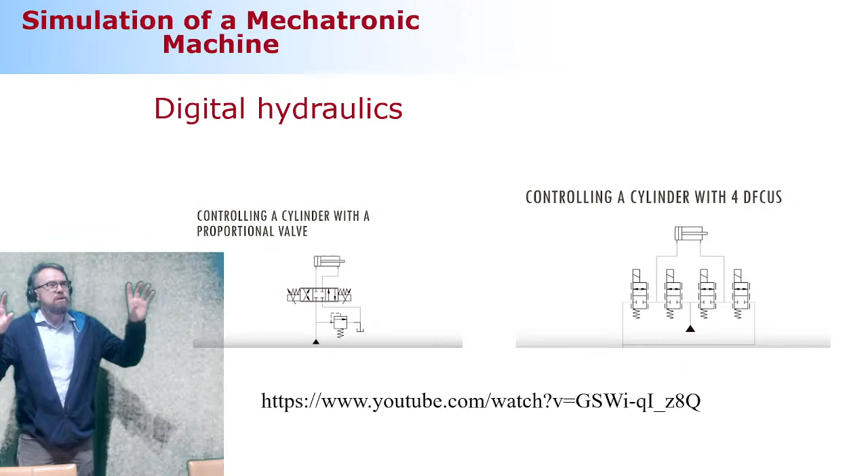So what's the deal with that? Remember, in conventional hydraulics, you move the spool to any position you want, so it can take any position between fully closed and fully open, in a fraction of the position with no problem whatsoever. That's called conventional hydraulics.

The problem is that if you look at the pressure on the supply side, and then close to the cylinder, there could be significant pressure drops. And that's equal to energy losses as well.

Now, instead of using this sliding component, you can replace it with a number of on-off valves, each of a different size. These on-off valves can only be fully open or fully closed, nowhere between these two extremes. One valve would mean you can have one kind of position in your spool - if you put it back to conventional hydraulics, that would mean one position only.

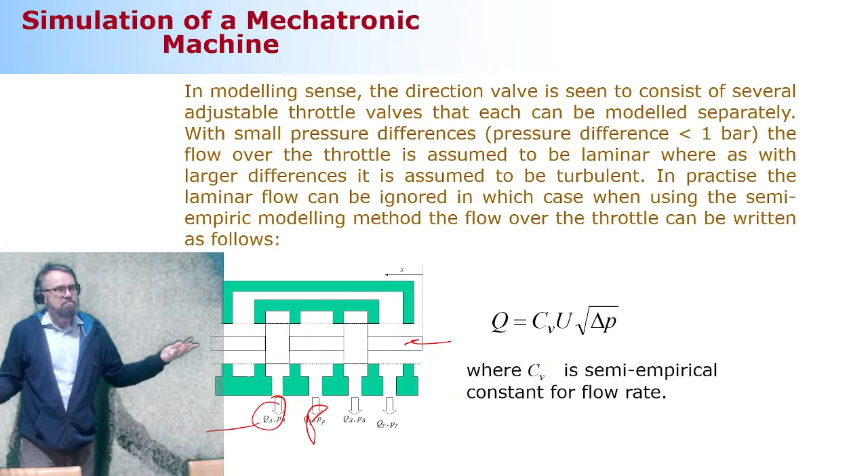But it needs a lot of CPU power, and a lot of clever algorithms to make that happen. But in theory, that's how it works. So digital hydraulics is all about a lot of on-off valves, a lot of poppet valves, and because you have so many of them, you can replace conventional valves.

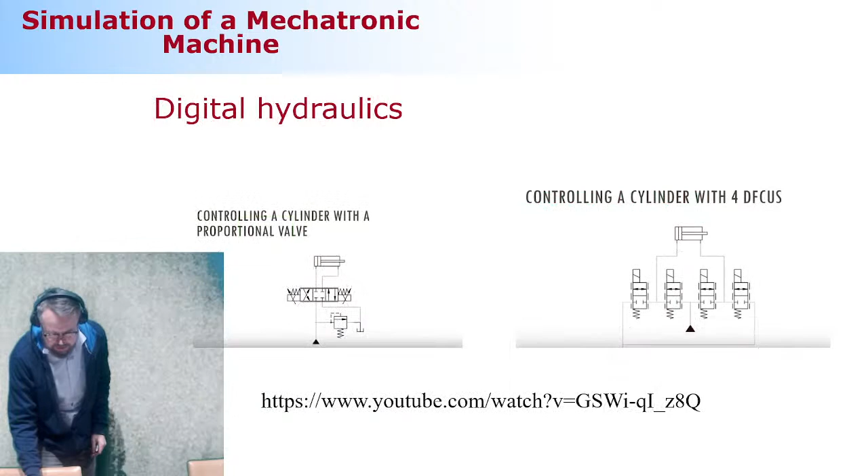This is the drawing symbol for a conventional valve - it can take any position between fully open and fully closed. You replace that with different sized on-off valves, and by opening and closing them in a proper way, you can get similar properties.

This is my YouTube video that I'd like you to take a look at - please take a look. It shows the different scenarios. Can I now play this?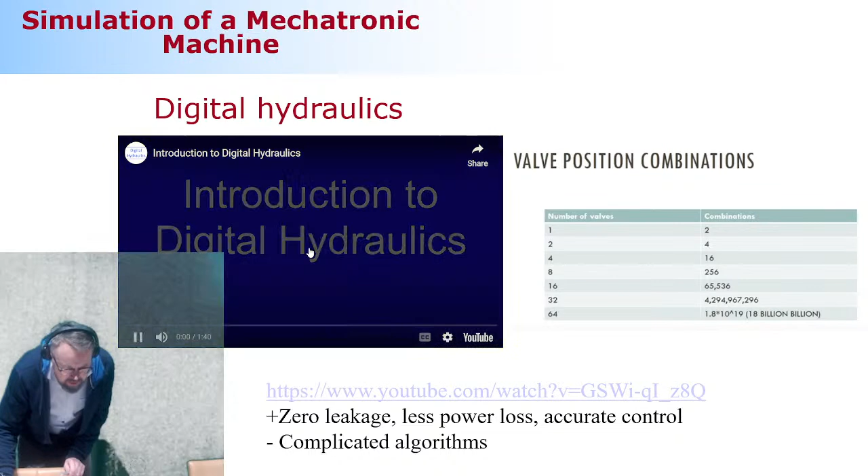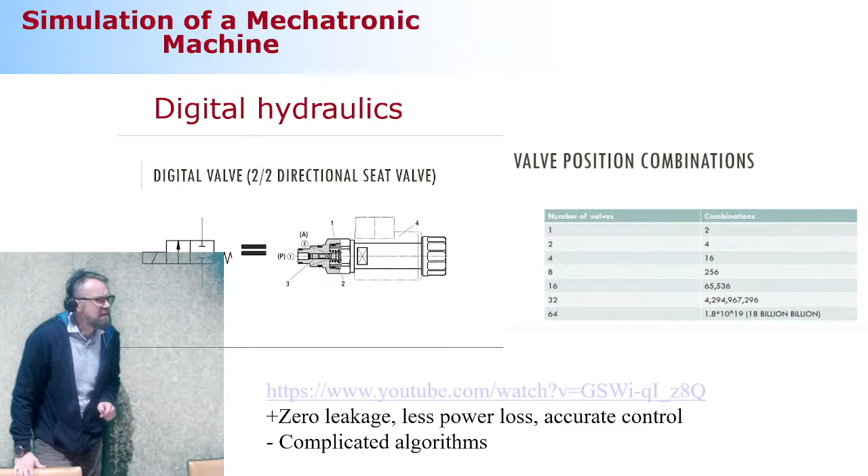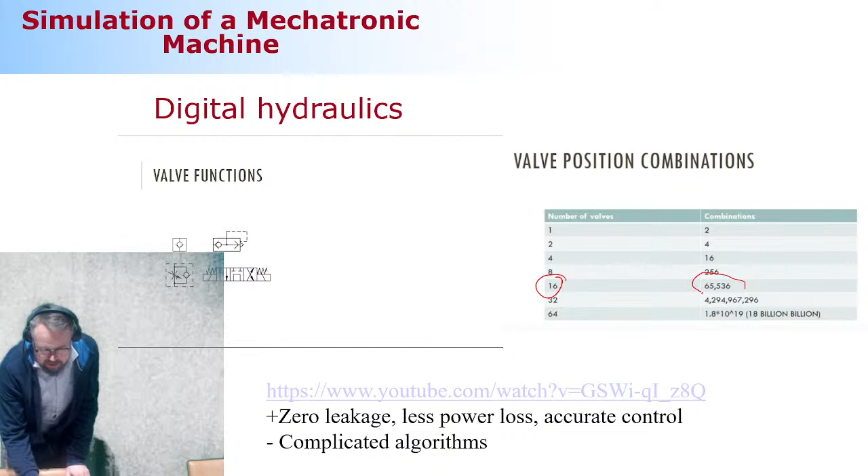In digital hydraulics, the system variables... flow is controlled with multiple on-off directional seat valves. Each valve is solenoid operated and has only two possible positions, on and off. This is why the term digital is used. These valves are used to implement all valve functions, such as pressure, flow, and directional control. Contrary to a traditional hydraulic system, which has many different types of valves, a digital hydraulic system has a large number of on-off valves.

By connecting in parallel three on-off valves of different sizes, such as 1, 2, and 4, different flow quantities can be achieved.

A group of on-off valves in parallel make up a digital flow control unit, called DFCU. At least 4 of these units are needed to substitute a proportional valve in a digital hydraulic circuit. Each DFCU is used to control one of the 4 control edges.

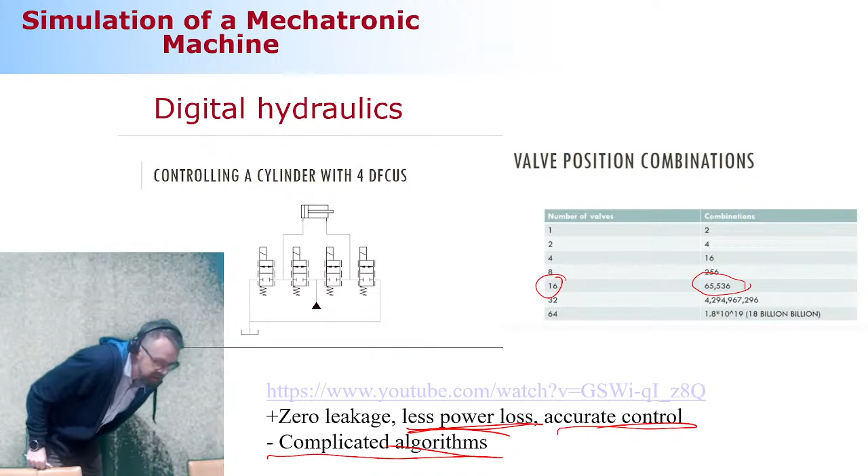The main benefit of digital hydraulics is the ability to control each control edge independently. This reduces power loss and enables precise control.

Additionally, seat valves have zero leakage, as opposed to the high leakage of proportional valves.

The challenge with digital hydraulics is the complexity of the control algorithm. Each valve needs to be controlled individually, and this results in large numbers of valve position combinations, although each valve has only 2 possible positions.

I'm done. No, but hold on, hold on.

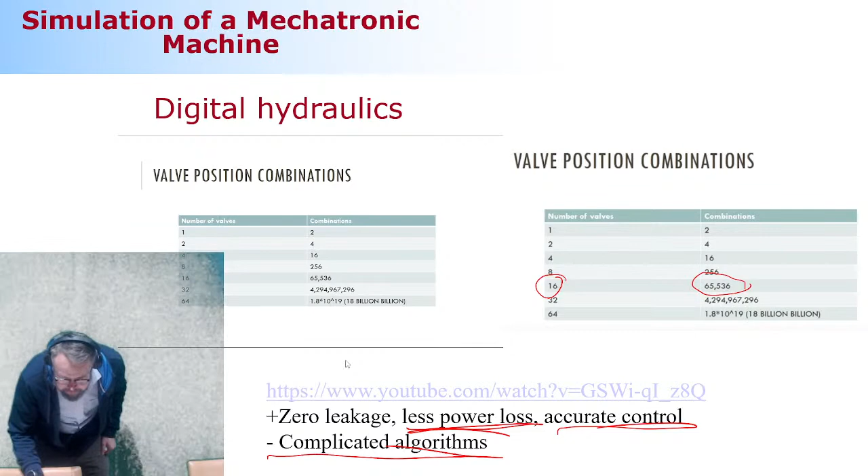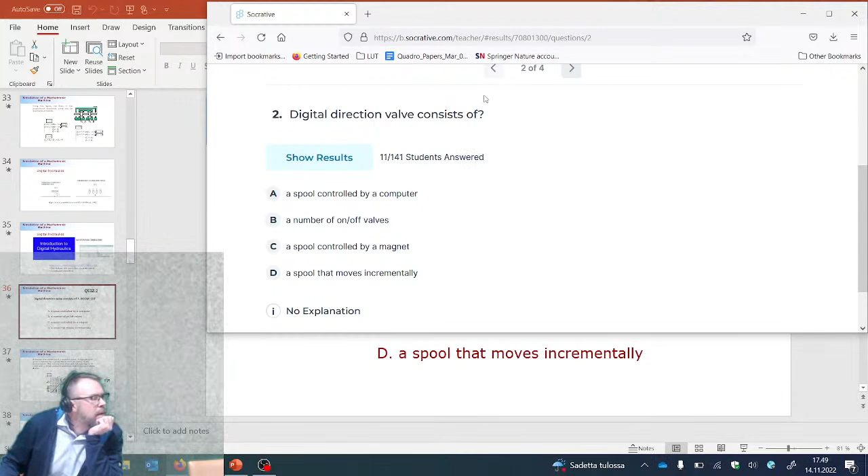Let me take myself back. Just a second, and this, by the way, would be it for the day. Okay, now there is a video in the background. Sorry, sorry, sorry, I think it is done. Okay, now everything is okay, back here.

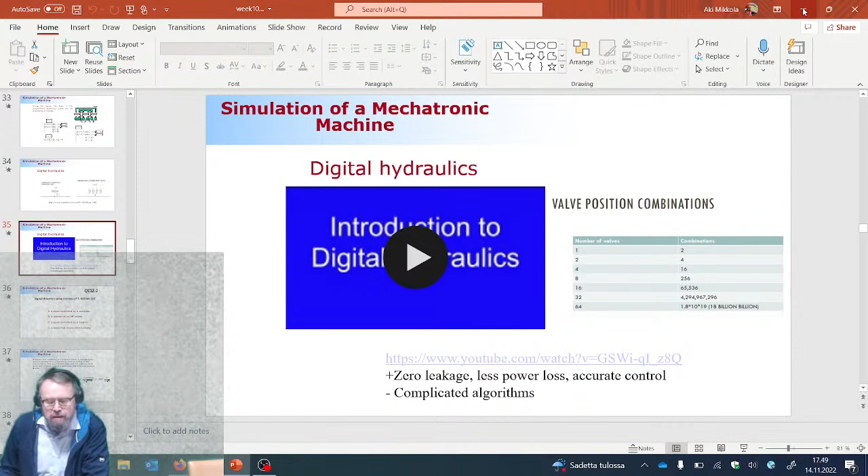Digital direction valve consists of a spool controlled by a computer. Spool, now here's the keyword, spool. Number of on-off valves. Spool controlled by a magnet. Spool that moves incrementally.

Okay, how many answers did we collect last time? 60, 67. Okay, and this is it.

So that's the last slide of the day. We continue to discuss the different components a week from now.

And you can go, because if we score 100%, I will let you know, you can trust me. Oh, you don't trust me? Yeah, it's not gonna be 100 this time. You're absolutely right about that. But can you see the... no, that's not on. Okay, so we got 50, 61, 62, 64. Again, the last time we got 65. Was it 65?

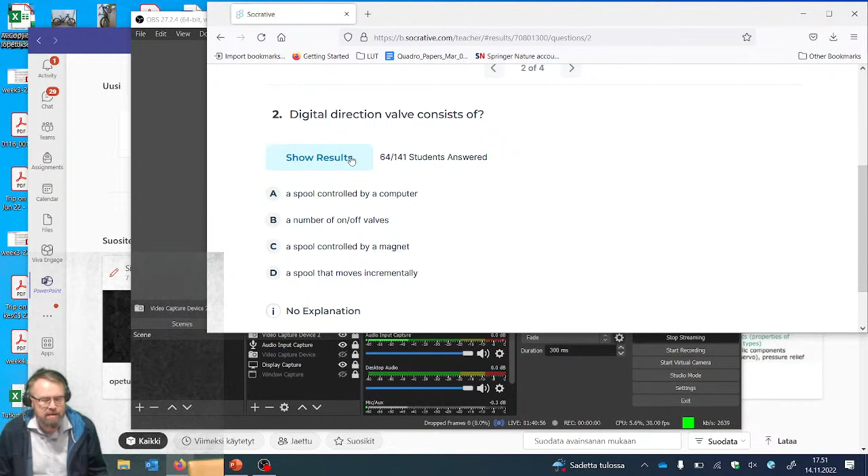So okay, and the game is on. Oh, by the way, last time I think we got the winner about the game, this success rate guessing game. Okay. And the success rate today is 71, 86, 71.

Okay, so the good news is that you guys are back to normal, so I don't need to worry about you guys anymore. I was very worried about what's going on, because if you start scoring 100% all the time, I need to get some medical attention for you guys. So, but we're back to the usual, so that's good news. Another piece of good news is this: no more dancing.